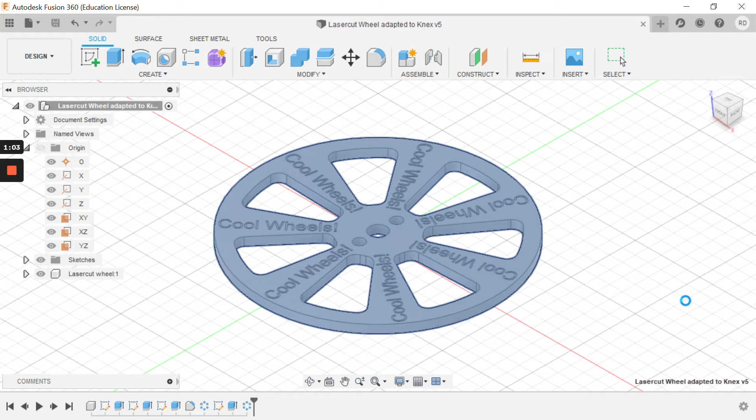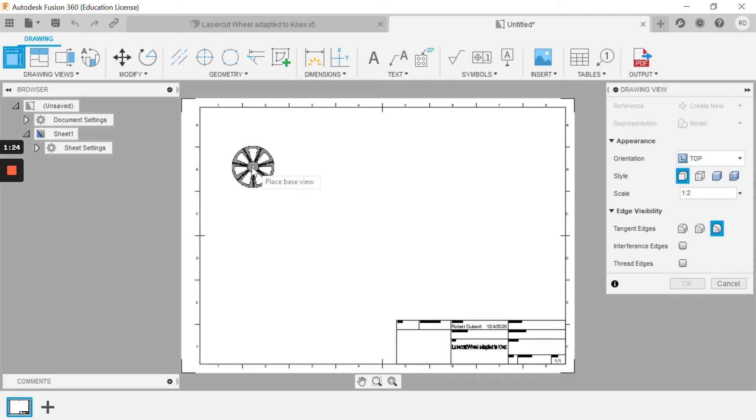What it does is open a new tab with the ability to bring in different views of your part and drop them wherever you want. Now looking here, you can see this is a front view - that's not the view I want. I'm going to change this to top view. Now I can see the view I want, but you'll notice the scale is 1 to 2.

We need it to be 1 to 1, so we get our life-size object. I'm going to move it into this upper left-hand corner. I don't believe it makes any difference, but I like to put it there. But make sure it's not overlapping any of those other items. Click once to drop it in place and say OK.

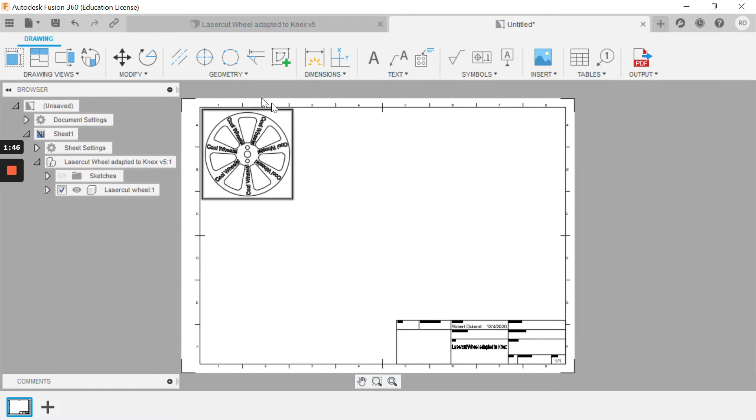By the way, the preview will be a little bit chunky, not as accurate as the actual file that it makes, so don't worry if it's not beautiful here.

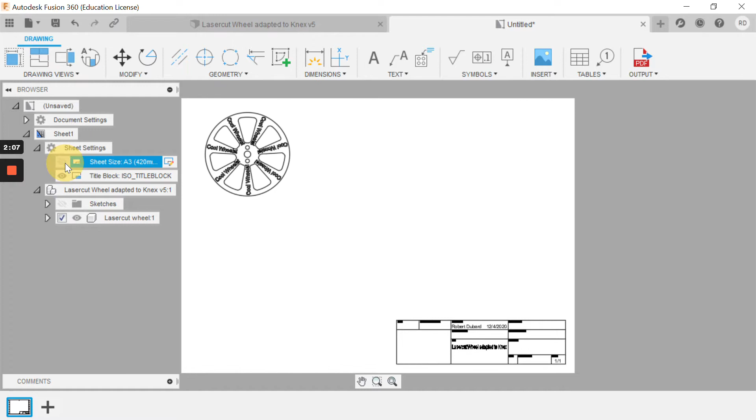Now, what we don't want to do is laser cut this outer perimeter or this information box, so we've got to turn that off. We do that here under Sheet Settings. Click this down arrow and you just turn off the visibility of those two items, so those will not be part of the PDF file that we're going to send to the laser cutter.

The laser cutter accepts PDF files, and our goal here is to export a PDF file. One other thing is that the line widths here do affect the accuracy of the laser cutter. In fact, I've had to go back if I want something to be exactly right and even change the dimensions in my Fusion 360 project so those lines don't end up messing up my dimensions slightly.

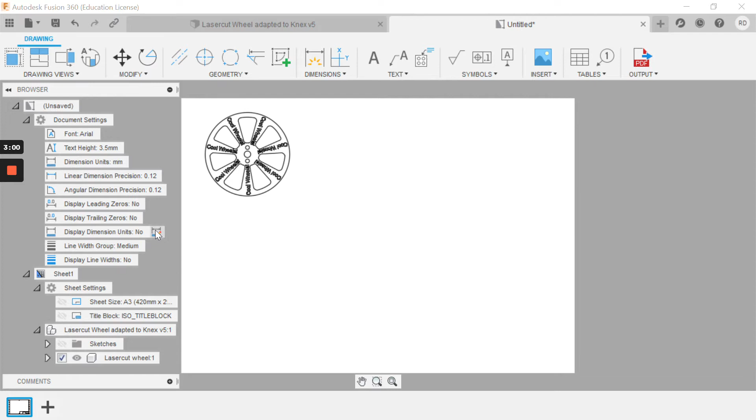One thing you can do to ameliorate that problem is here under Document Settings. It doesn't eliminate it, but it makes it less bad. Under Document Settings, you click this down arrow, and you can hover on any of these, and if you click on the thing that pops up, just a single left click, it opens up this dialog box. There's a lot of stuff in this dialog box.

But the one we're looking for here is the line width group. You can choose very thin. In fact, it may be possible, though I'm not sure how, to actually go in and change the line width here, but I think they're pre-existing in groups - you can't actually change that. So you want to do the very thin line width group and say OK.

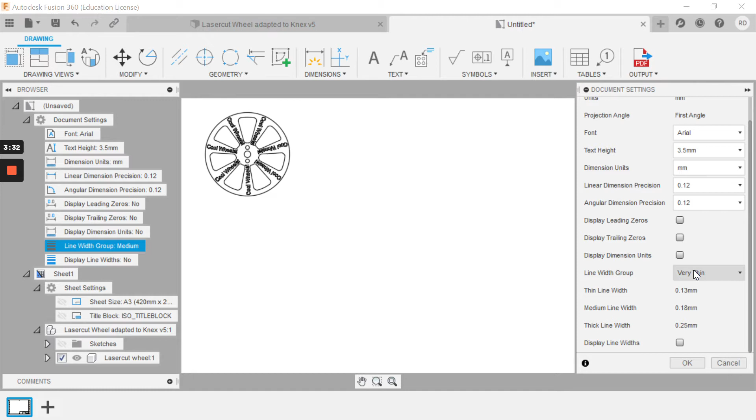Now it doesn't make any visible difference here, but I think it does make a difference when you send it to the laser cutter. So now we need to export this as a PDF. Up here in the top right-hand corner there's Output PDF - you just click that and agree to it.

Now it's going to try to save this PDF somewhere. Be sure you're paying attention to where you're saving it. I'm actually just going to save it in my download folder since that's easy enough to do. And you've got to give it a name, so I'm going to call this Cool Wheel and save that.

So now I've got that saved as a PDF, and it's ready to go to my laser cutter. Except, here's an issue - I don't want it to cut the word Cool Wheels all the way through. So I actually need two versions of this file. This version would be the one to engrave with, and then another version would be the one to actually cut with. So I really only have this one file right now.

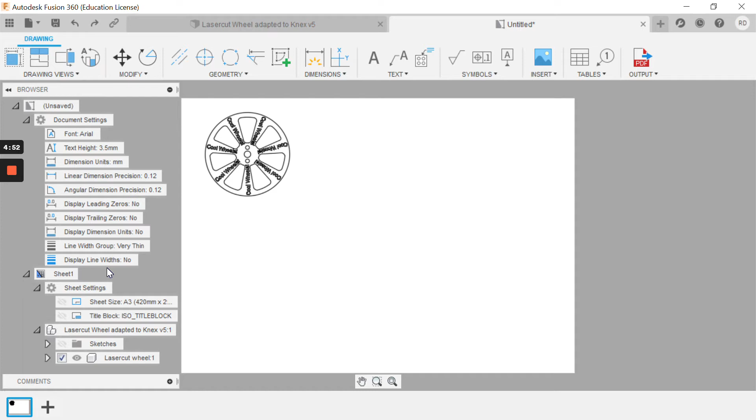I need to actually go back and change this model so it does not have the most recent feature in it. At one point I was under the impression that you could turn on and off the sketch and make that work, but that is not consistent. It's better to go in and just make another one.

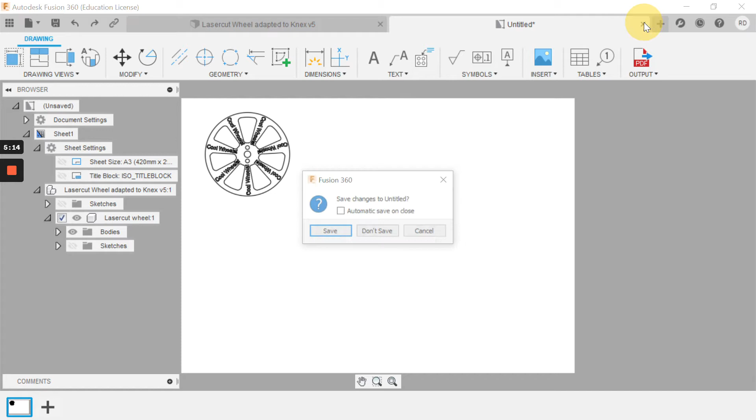So I'm going to close this drawing. It's going to ask if I want to save it - there's no reason to save it because I saved the PDF, which is all I need. And now I'm going to go back into here, and I'm going to roll back the engraving. So now I have just the items I want to cut.

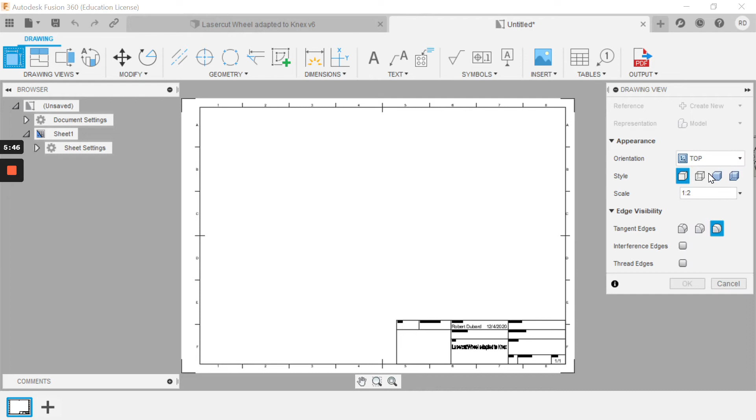I will then repeat the process of making a drawing from this design. Because I suppressed, by rolling back, the two features and sketches necessary for the engraving, those will no longer appear.

I'm going to back it up into the corner here. Notice I changed it to top view and 1-to-1 like I did before. I say OK, and I change my sheet settings so that I hide the border and the information block.

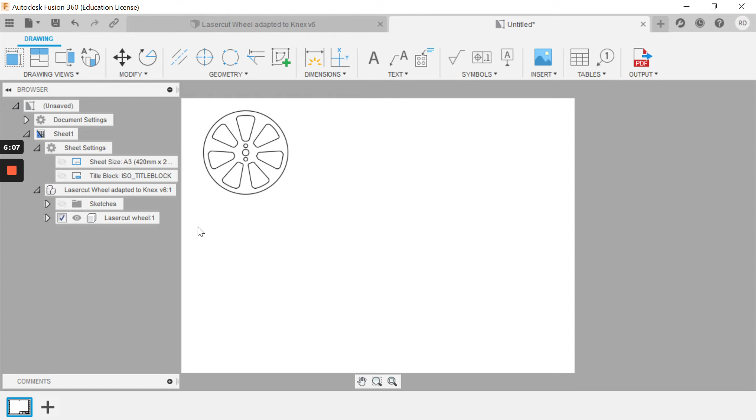I change my document settings by clicking this to a very thin line width, say OK, and then output this as a PDF. I'm going to give it the same name, but add the word 'cut only.'

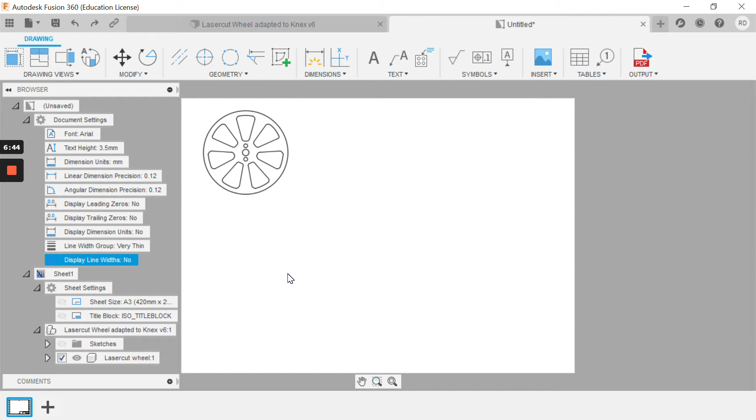Click Save. So now I have two files, the same object and scale, with the same line width. They're absolutely identical, except one has the engraving suppressed and the other has all of the engraving showing—two different files. I can close this; I don't need to save since I already saved the PDF, so I don't need the Fusion drawing. I'm actually done with Fusion now.

I'm going to minimize it, but I could close it. Now, to get that into the laser cutter, our laser cutter here at Ransom has the web address 172.16.2.61. As long as I'm on the Ransom network, typing that in will connect me with the LC-40 that we have over there.

So over here I go to Import File, then click here to choose your file. I'm going to bring in the engrave file first. Click that, click Open. Now this is very important: because it's the engraving file, I'm going to import engrave only and continue. That comes up, and I can say OK.

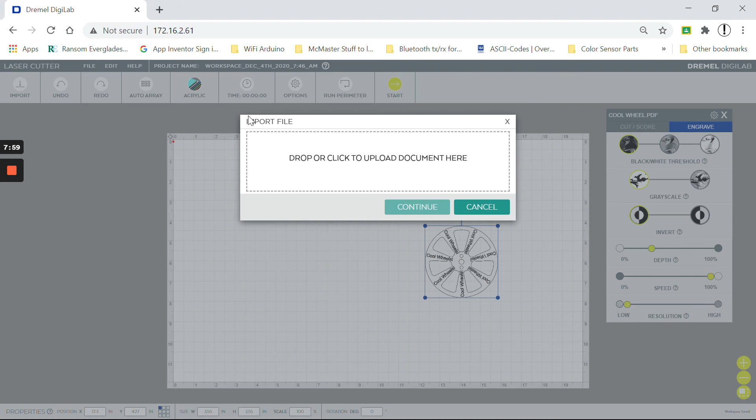I'm going to move this over here to some random spot for now, and I'll explain why shortly. Then I'm going to import the other file—this time the cut file—and change this to import cut only and continue.

Now I'm going to click on it, and under Properties, change its position to 1 inch here, and also 1 inch here—I hit a 0 there, I think. That one should be 1, this one should also be 1: 1 inch down and 1 inch over.

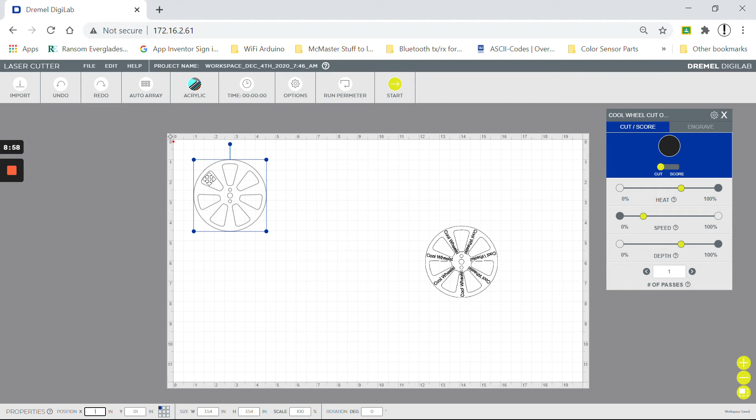The reason I have to do 1 inch is because I am going to be doing some engraving, and it cannot engrave right at the edges. If you're trying to save material in your laser cutter, you can physically move the material, so it's about 1 inch over and 1 inch down from where the laser sits at 0, 0. But if you put your material all the way up in the corner, it'll just start cutting about 1 inch over and 1 inch down for the boundaries of this thing.

Anyway, I go to the next one and put in the exact same location: 1 inch over, and... 1 inch over, and... there we go, 1 inch down. What this does is it places them precisely on top of each other.

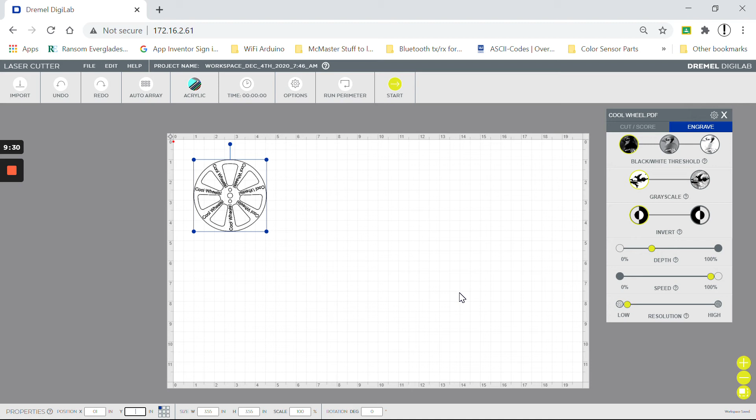One other thing you should check is the scale—make sure it's 100%, though it should be by default. The other default settings, like the engrave settings in here, are set by the material you choose. We're using 1/8 inch acrylic, so I go to acrylic and 1/8 to choose my material. These numbers are generally pretty good in the software, so we don't have to make changes there.

At this point I realized I forgot to mention something: not only do you have to be on the same network as your laser cutter, but your laser cutter actually has to be turned on for this software to launch. So part of the noise you might hear in the background, this air-blowing sound, is our laser cutter—it's turned on already. My laser cutter was turned on before I even launched this in the browser.

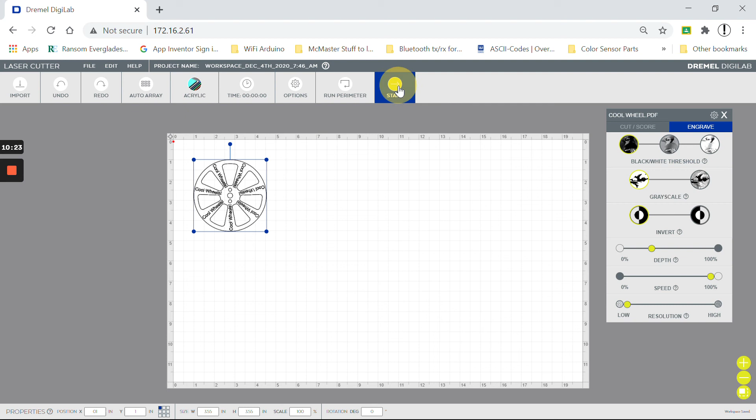So now when I click start, it sets up and says execution order. This is important: make sure it's set up so that your engraving occurs before your cutting.

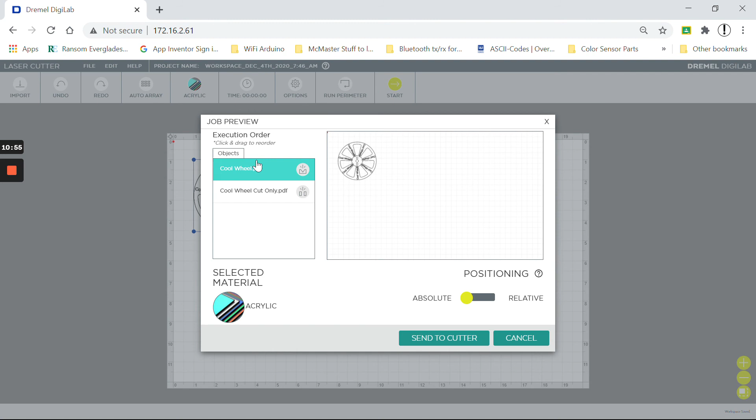That's one of the reasons I gave this file the cut name, so I knew it would cut after it engraved. If you do it in the opposite order, it might not engrave right, because after it cuts, the part shifts a little as it falls down and separates from the rest of the material. So if you want your engraving to happen in exactly the right location, engrave before you cut.

Anyway, I'll let you know as I send to cutter, and everything else happens at the laser cutter. I would go over to the laser cutter, set up my material, focus the laser, close the lid, and start the process of laser cutting this. I'm not going to do that now, and in fact I would encourage students of mine to let me be physically present when they first do this so they know what they're doing.

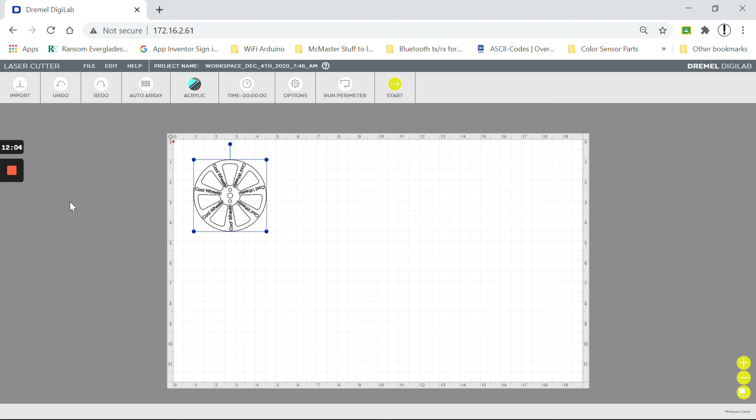If you are away from the laser cutter, you can still do all the work we did in Fusion 360 up to the point where I went to this browser and started the Dremel software. You can do all of that, and then you're prepared to bring in the cut and engrave files and locate them in this software before you go. So that's basically how to get the images out of Fusion 360 for laser cutting in a nutshell. Thank you for watching, and I look forward to working with you in the future on that.